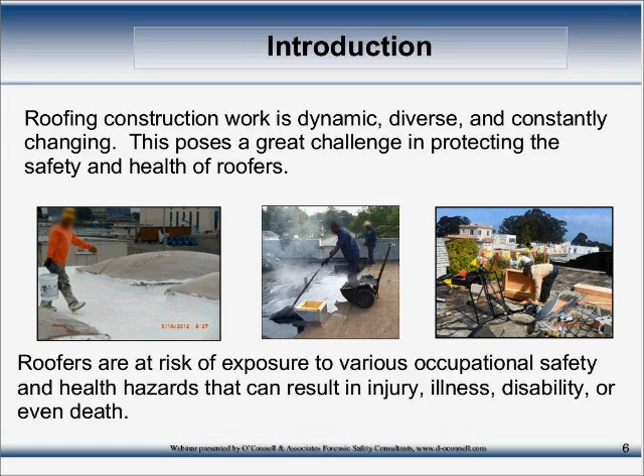More traditional forms of roofing construction include hot asphalt, shake and shingle, and tile roofing with aggregate-based products like slate, clay, or concrete. Now we will look at some of the hazards for each roofing application on the next slide, please.

In slide 7, we look at roofing safety and the specific health hazards. The focus of slide 7 is roofing type and work hazards. At the top of the left column, roofing type, and directly below is a list of several other roofing construction applications starting with single ply down through shake and shingle. In the column directly to the right are the related potential health and safety hazards of each application.

If we start with single ply, used here in the generic form, it also includes thermoplastic membrane, cool roof, and white roof installations. Single ply roofing includes rubber polymer membranes laid down as a single layer over a low or steep slope roof. Roofers use solvents and adhesives to clean and glue down materials, and both have toxic and flammable properties, requiring ANSI-approved personal protective equipment.

Also known as PPE, which include chemical gloves, goggles, safety glasses, face shields, impervious aprons or suits, and other appropriate chemical PPE to prevent exposure to fumes and skin absorption.

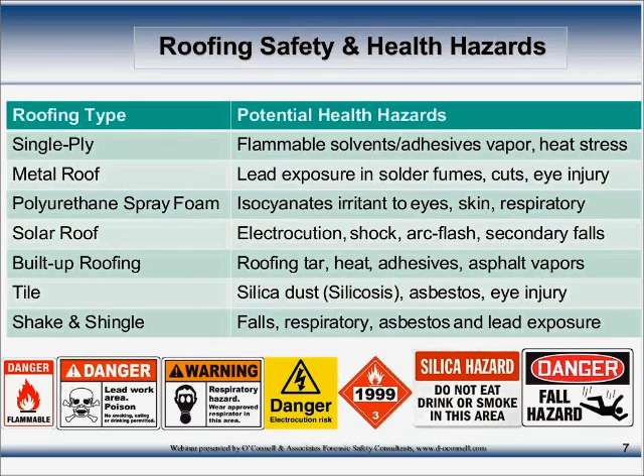Slide 8 details occupational exposures to lead. It shows a roofer soldering a pipe collar with a propane torch and a roll of lead solder in his hand. As no respirator or gloves were being worn in this case, it was probable that lead smoke and fume were being inhaled and there was potential contact contamination to the exposed skin, in this case the roofer's hands.

Roofer lead exposure comes from soft lead solder and the use of flexible lead roof collars, and also other materials made from lead found on roofing construction projects. Lead is most commonly absorbed into the body by inhalation during soldering. When workers breathe in lead as a dust, fume, or mist, their lungs and upper respiratory tract absorb it into the body. They can also absorb lead through the digestive system if it enters the mouth and is ingested.

Many roofers handle lead collars without gloves or other protective considerations. This reminds me of a roofing contractor discovered using flammable chemical products, hot asphalt, gas, and propane. When asked by the on-site safety inspector where they kept their safety data sheets, also known as MSDS, the contractor responded by saying, 'What hazmat? We don't have hazardous materials in roofing.'

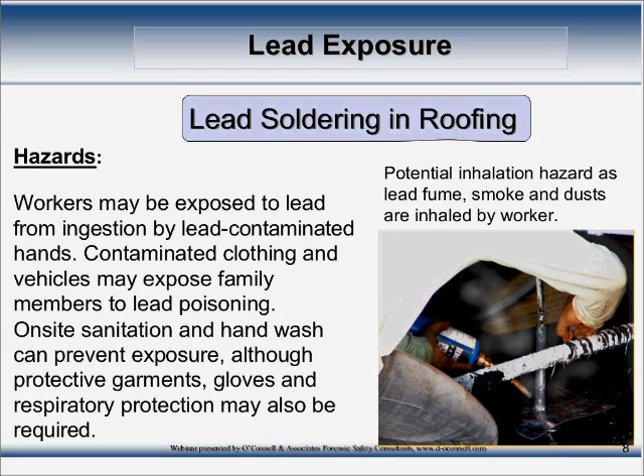Now at slide 9, we look at toxic solvents and adhesives. Based on the use of toxic solvents and adhesives in the roofing trade, many operations have been found to have a casual approach to chemical use on the job site. Similar to lead, many roofing operations fail to inform workers with proper safety training and PPE.

Basically, there are two types of health effects from chemical exposure: acute and chronic. Roofing chemical exposures are primarily derived from common roofing trade products such as solvents, cleaners, mastics, and adhesives. Solvent exposure is especially prevalent throughout the solvent wipe-down procedure. To many companies and workers, the process of cleaning a roofing membrane with a cloth and solvent seems relatively innocent, but in actuality it puts workers at risk by exposure to inhalation and absorption, not to mention the fire hazard.

Since xylene, a common solvent found on roofing construction projects, may place workers at greater risk to falls after working with or around xylene and the fumes from xylene and other flammable solvents, let's take a closer look at this subject.

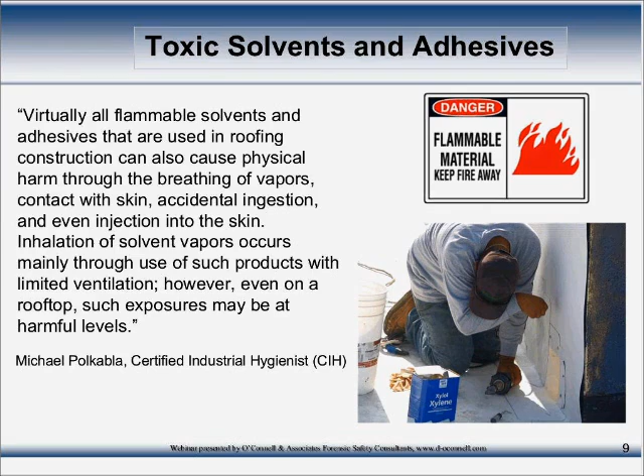This brings us to the question section, and I will hand this back to Emily.

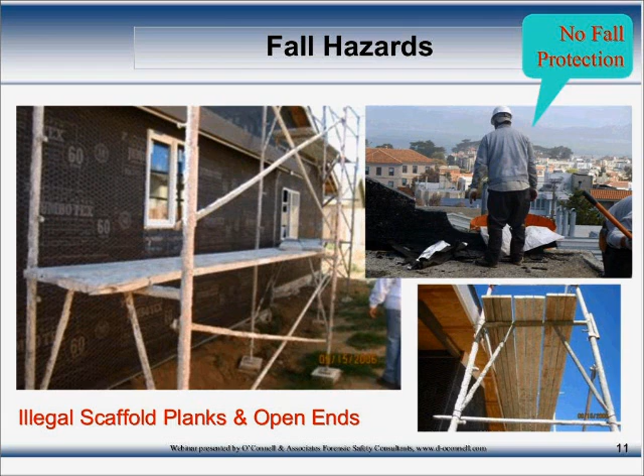According to the U.S. Department of Labor, fatal work injuries involving falls are the leading cause of construction fatality. Falls from ladders and roofs still account for the majority of falls. The U.S. Department of Labor lists falls as one of the leading causes of traumatic occupational death, accounting for 8% of all occupational fatalities from trauma. Falls are the most frequent cause of fatalities at construction sites and annually account for 1 of every 3 construction-related deaths. Advance slide, please.

Slide 12 gives us a view of skylights and open roof holes, which are frequently identified during on-site roofing safety inspections. Recent NIOSH investigations suggest that employers and workers may not fully recognize or comprehend the gravity of fall injury threat associated with working near unprotected skylights and roof openings. As a result, skylights and roof openings are left unguarded or uncovered as workers continue to suffer injury and death.

Solution: Skylight Safety training.

Employers should take the following measures to help prevent roofer injuries and fatalities from falls through skylights and roof openings. First, develop, implement, and enforce comprehensive written fall prevention program elements that at a minimum comply with applicable OSHA fall prevention standards.

Also, assign a competent person to inspect the worksite before work begins. They can actually do that at the pre-work stage where they're doing the quotes and takeoffs, to identify fall hazards and determine appropriate fall prevention systems for workers, and actually work it into the bid.

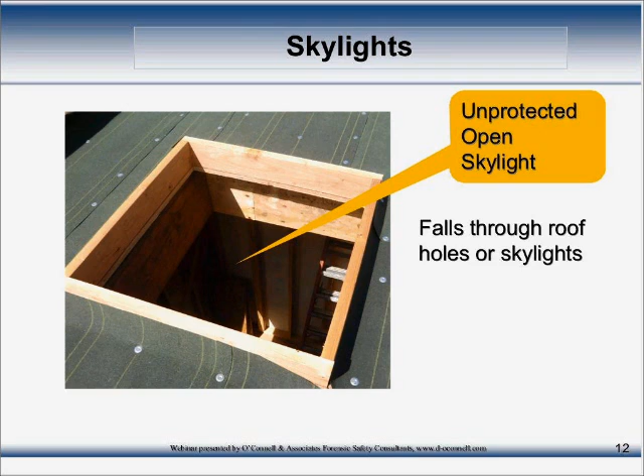Okay, next slide, please.

Roofing kettle safety is our next issue of concern. To set the tone for this section regarding roofing kettle hazards, let's look at a few true stories. A 40-year-old male was sprayed with hot tar when a pipe on a tar pump, which is part of the kettle and comes complete with a motor that pumps hot molten materials out through pipes, failed. He suffered partial thickness burns over 2.5% of his body and third-degree burns over his hands. He was hospitalized for 13 days.

In another case, a 41-year-old male was walking backwards along a 20-foot roof with a hot tar dispenser, a sort of roller that allows hot tar to drip onto the roof. When he reached the edge of the roof, he lost his balance and fell backward. The dispenser got stuck on the roof but tilted down, pouring hot tar on the victim as he fell. He had multiple fractures along with a grade 3 liver laceration and 15% of his total body surface area burned. He died 3 weeks later in the hospital.

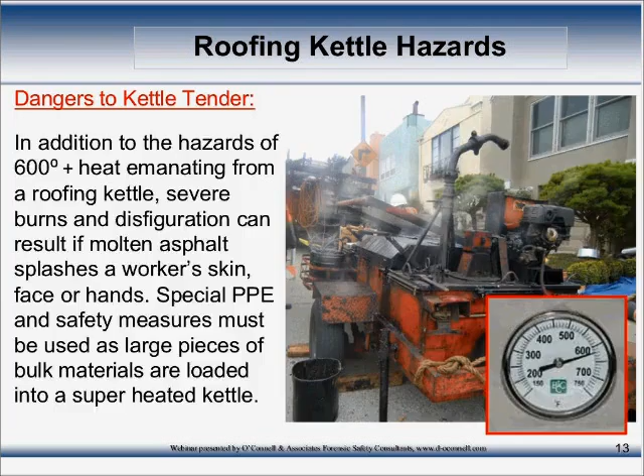Okay, we're going to advance to the next slide, please, and take a look at asphalt fume exposure. This subject dovetails in nicely with the previous topic of kettle safety, and is listed by OSHA and the Center for Disease Control as a respiratory inhalation hazard.

In a CDC study, bronchitis was reported by roofers as an issue of concern, and since so many roofing projects use some type of molten asphalt or rubber, workers' fume control is paramount.

A safety data sheet for asphalt used in roofing by the Owens Corning Company indicates the following health warnings: inhalation of vapors, fumes, or mist produced by asphalt may be irritating to the respiratory system.

And also NIOSH found that in a 2000 study, asphalt fumes, once again, are considered a potential occupational carcinogen.

Studies of workers exposed to asphalt fumes have not established an association between the fumes and eye injury, although fumes from the product may cause severe irritation, redness, and blurred vision.

This product may be harmful or fatal if swallowed, obviously, and chronic respiratory skin conditions may develop from workers exposed to these types of products.

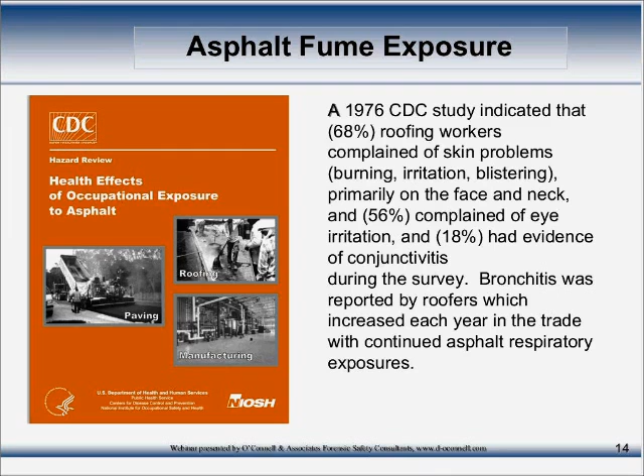At this point, we're going to take a look at some of the ergonomic hazards and issues involved in the roofing trade.

And ergonomic injury is also referred to as work-related musculoskeletal disorder, or WRMD.

The big three roofing ergonomic risk factors are force, how much you lift, push, or pull, repetition, how often the task is performed, and posture, or body position.

Other potential ergonomic risk factors include vibration, contact stress, sustained exertions, cold temperatures, and physical condition or a pre-existing health issue, all exacerbate the ergonomic hazards for roofers.

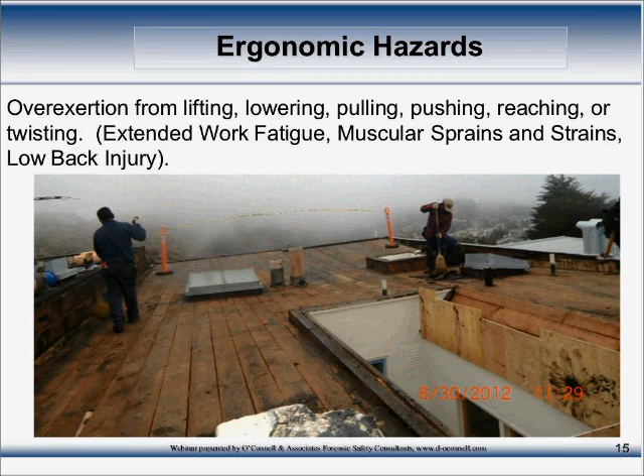Vertical roof penetrations like these also include sharp-edged vertical conduit or rebar, reinforcing steel hazards that should be controlled but rarely are.

If a roofer or worker falls onto one of these, beyond the immediate soft tissue damage that will result...

If the pipe is sharp enough or has a small enough diameter, penetration into the body resulting in serious internal injuries or death is something that must be considered.

Protection for that hazard is guard all protruding ends of pipes and steel with proper caps or wooden troughs.

You can bend the pipe or the rebar so exposed ends are no longer upright in vertical order. Also, when employees are working at any height above exposed vertical rebar, pipes, or other small diameter roof penetrations, fall protection and prevention can be the first line of defense against impalement.

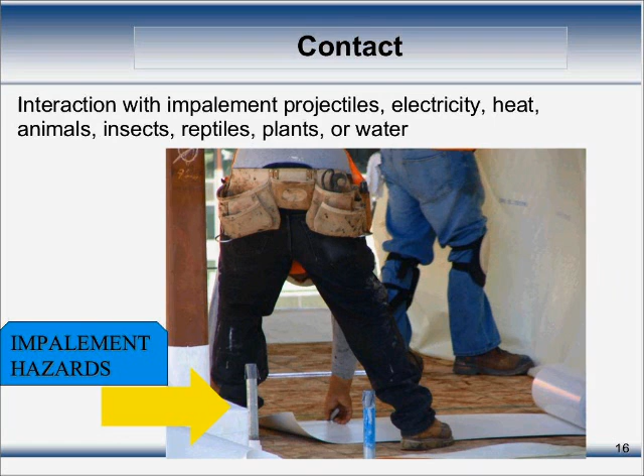For recent roofing safety inspections, workers were exposed to roof penetrations and impalement hazards on 140 projects, and out of the 140 projects inspected, 75 had impalement safety violations. Also, greater than 50% of all inspected roofing construction projects, or 1 out of 2, had impalement hazards.

This takes us to a look at environmental hazards. Roofers who are exposed to extreme heat conditions on roofing projects are at risk of heat stress illness.

We do a lot of inspection work in the San Joaquin and Sacramento Valley, and when it's hot there, as you ascend to the roof level and begin walking across an active roofing work zone, the temperature of that area is so much hotter than any place else on a project, on that construction job, that exposure to this type of heat can expose one to heat stroke, heat exhaustion, heat cramps, or heat rash.

Heat can also increase the risk of injuries, or workers may experience sweaty palms, fogged up safety glasses, and dizziness, which can result in falls off ladders. Also, burns from hot asphalt or torch use may also occur as a result of accidental contact with hot surfaces or steam once you are heat stressed.

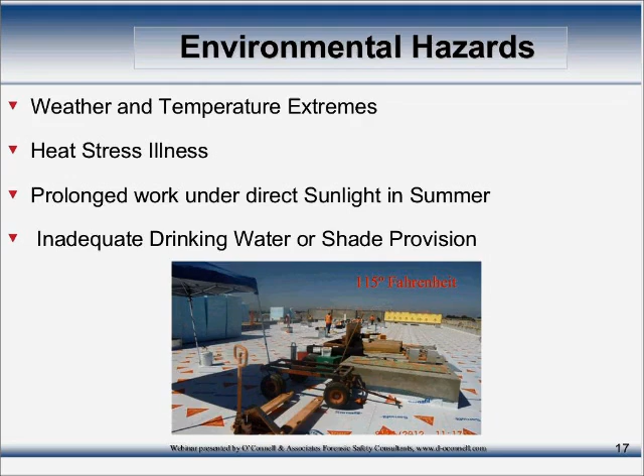We will now advance to the next section, which is a resource section, selected internet resources that are available for more information on roofing safety.